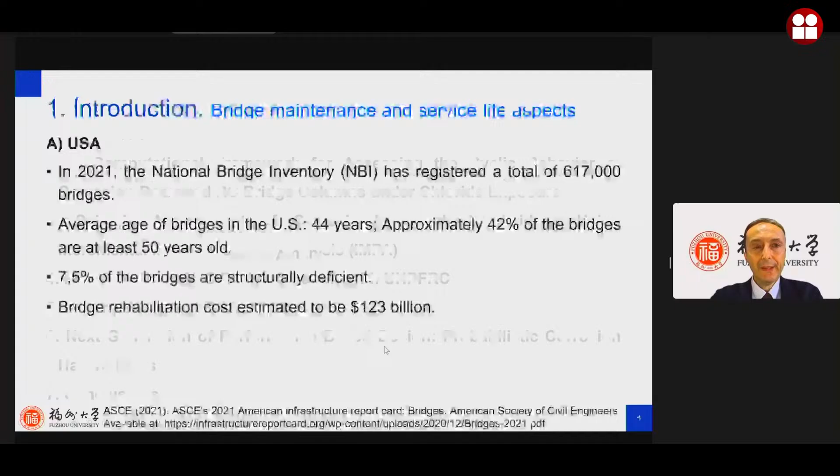So what is the problem with bridge maintenance and service life? If we look at the situation in the US, of the more than 600,000 bridges in the National Bridge Inventory, the NBI, the average age of bridges is more than 44 years. More or less 42% of the bridges are at least 50 years old. Another data point that gives us the dimension of the problem is that almost 7.5% of the bridges are classified as structurally deficient, so they need to be rehabilitated. This bridge rehabilitation cost was estimated to be more than 120 billion. So this gives you the dimension of the problem in the US.

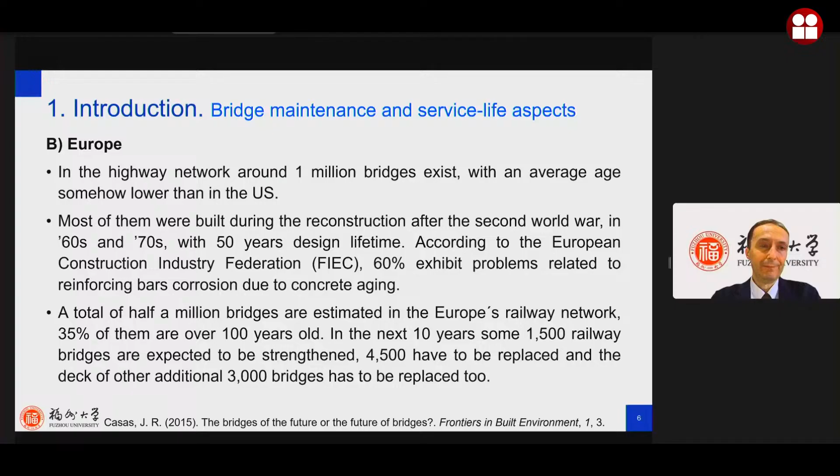Regarding Europe, we have around 1 million highway bridges, and most of them were built after the Second World War, so in the 60s and 70s, when they were designed for a 50-year design lifetime. Now we usually consider a design lifetime of 100 years, but in the bridge community we are opening a discussion to extend the design lifetime. I clearly remember a lot of discussion, for example inside the International Association for Bridge and Structural Engineering, to extend it to 200 or 150 years to have more durable bridges. According to the European Construction Industry Federation, 60% of these bridges already show problems related to reinforcement bar corrosion due to concrete aging. So this gives you another idea about the kind of problem we need to face.

What about China, the country where I've been working for 15 years? The number of bridges is not so far from Europe's, more than 900,000. The average age of bridges is much smaller than in the US, but even though they have mostly been built in the last 20 to 30 years, the proportion of structurally deficient bridges has already surpassed the US. It's becoming a really big problem also in China.

What about Mexico? Of course, you know your country better than me, but from what I know, the Mexican bridge management system reported that over 60% of the 8,000 existing bridges on non-toll highways have been in service for more than 30 years. So also in Mexico, I suppose this aspect of aging of existing bridges is becoming very hot. And on the other side, the average daily traffic is growing, and this is strictly correlated to the accelerated deterioration of bridges across the country.

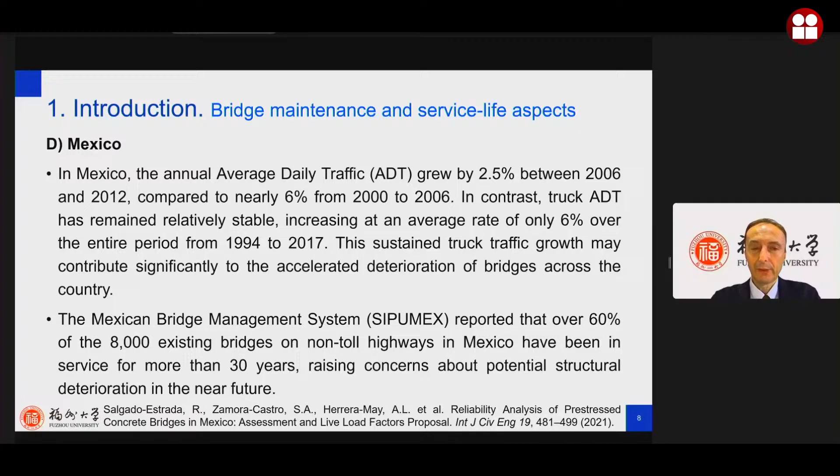So new solutions are needed to improve bridge sustainability and extend service lives.

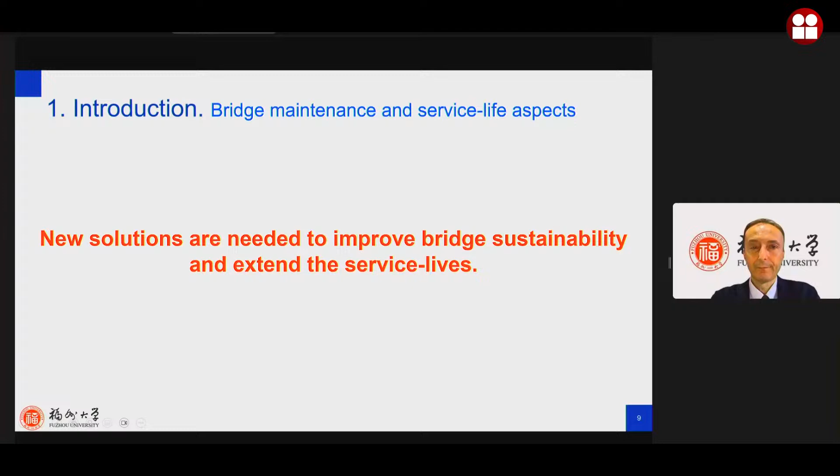If we go a little bit inside the problem, we know that concrete, this material that when it started to be used was considered to have a very long lifetime with no durability problems, but afterward we realized there can be degradation of concrete due to mechanical, physical, structural, chemical, biological causes, or also due to corrosion.

Entering a little bit inside reinforcement corrosion, it can be due to carbonation, to stray current, but also to the attack of chlorides. We will show only something related to this kind of corrosion. Reinforcement corrosion, of course, has a big influence on load-bearing and serviceability performance. There is the phenomenon of cracking in the concrete, so concrete integrity is influenced. There is a bar section reduction, a bond deterioration. And very importantly, the steel bar properties change due to corrosion, and there is a loss of ductility of the material.

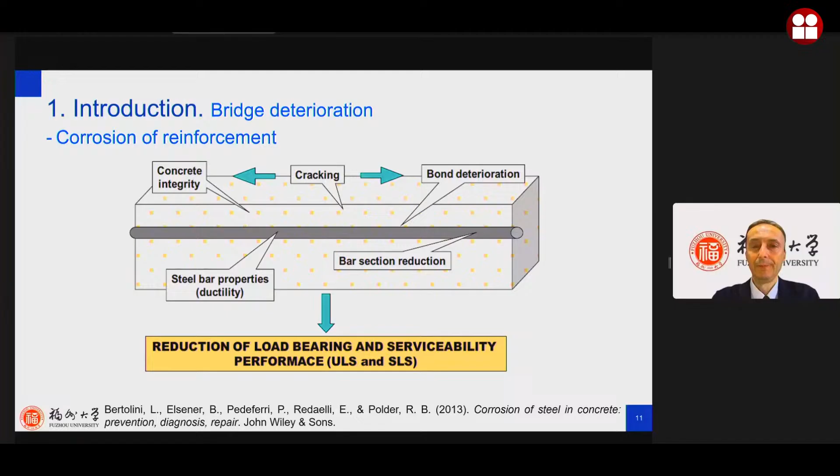The corrosion, and also this one is really well known, can be due to uniform corrosion, so the cross section is going to uniformly change, but there can be also the so-called localized corrosion or pitting corrosion.

There is a reduction of the cross section area, and so if there is a reduction of the cross section, of course there is a reduction of the rebar strength, but also the concentration of the deformation in the deepest notches, called pits, due to pitting corrosion, reduces the global ductility. And these things not only influence the strength and ductility, but also the buckling resistance of this section.

And if we consider, of course, the reinforcement in compression, this is a very important aspect during, for example, an earthquake.

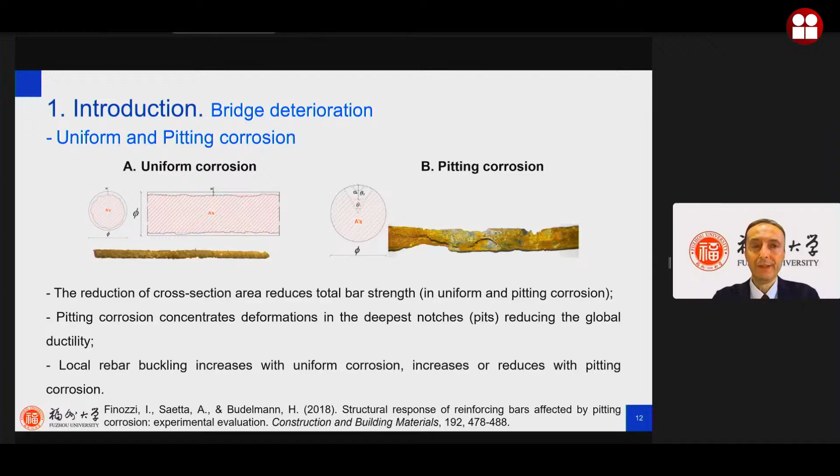We have also worked with Professor Humberto Varum. Tomorrow you will have his presentation. We, and some colleagues in Pakistan, Professor Masood Rafi, have investigated this kind of problem, trying to find some law for these kinds of problems.

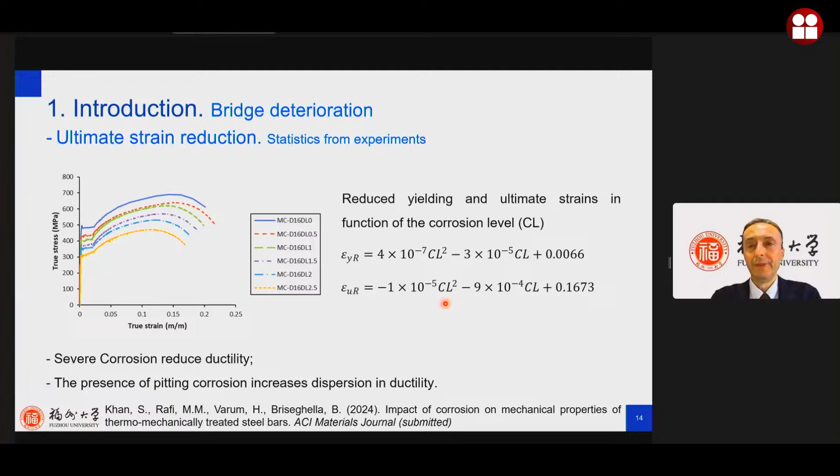But regarding this problem of the ultimate strain reduction, we have also proposed to give an interpretation. Now we'll not go in detail, but you can find all the references if you'd like in some of my publications, in structural concrete.

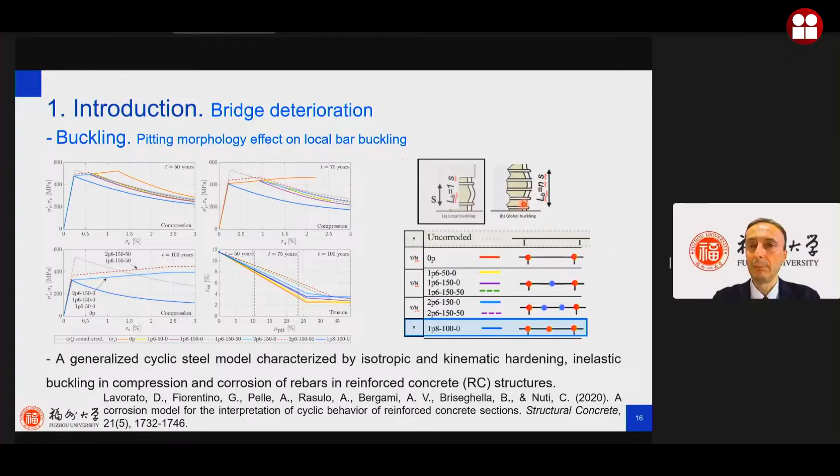And we tried also to develop a cyclic model for the steel reinforcement, able to consider the buckling effect and also the effect of corrosion. We consider the local buckling that can happen between one stirrup and the other, or also the global buckling that involves more than two stirrup transverse reinforcements.

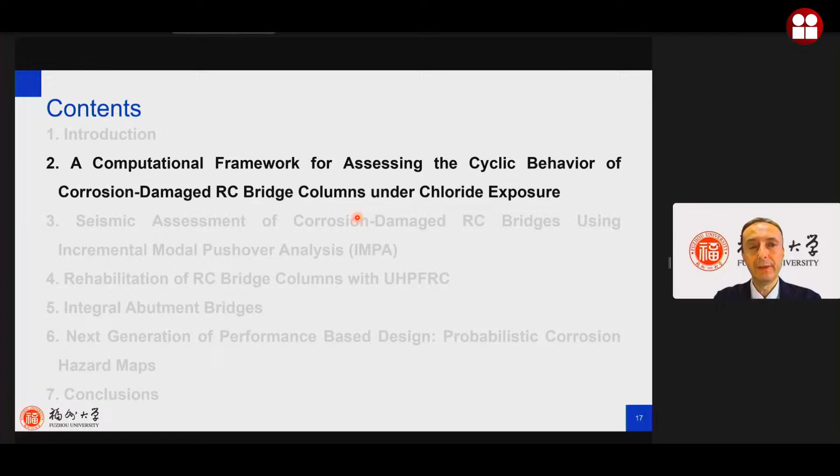But let me a little bit introduce this framework we have proposed for assessing the cyclic behavior of corrosion-damaged reinforced concrete bridge columns. The idea is to link multi-physics software—in this case we use COMSOL, probably some of you know this software—to do all the simulation regarding the durability of the steel reinforcement with this nonlinear multi-physics software.

And after, to do the structural simulation using a finite element software. In this case, we use OpenSees, but also other software, SAP2000, or whatever you want can be used.

In the COMSOL software, the chloride ingress in concrete was simulated as a diffusion process, and we consider the effect of temperature, humidity, corrosion-induced cover cracking, and concrete aging.

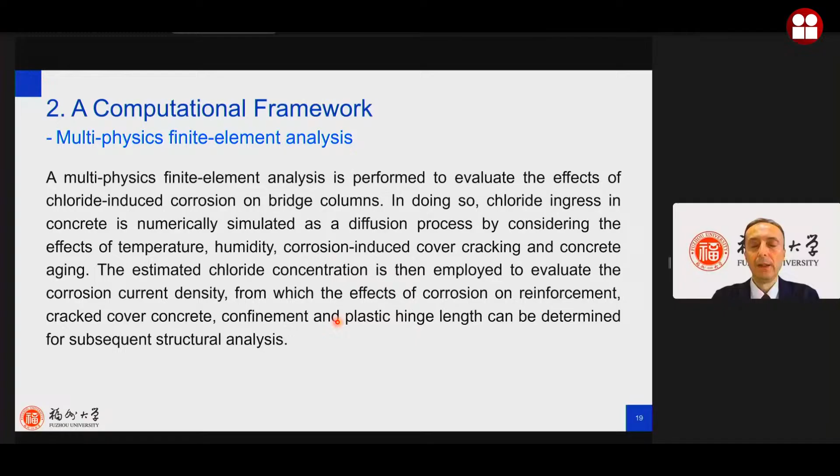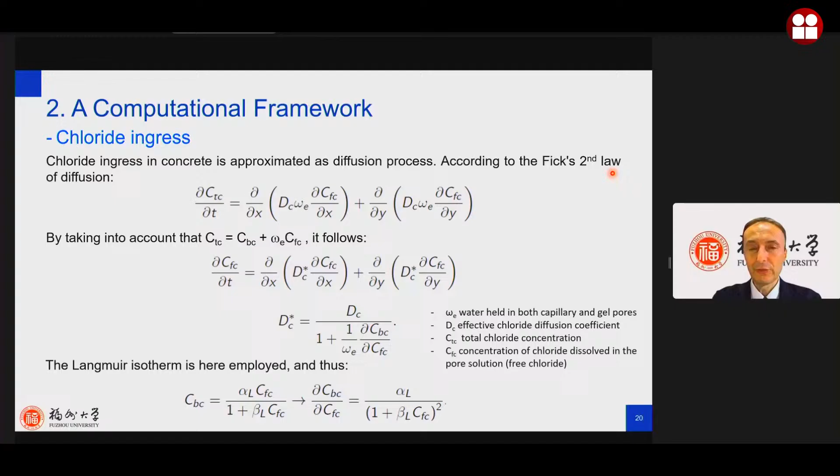Now, I don't want to enter in detail regarding the software we implemented, but just to give you an idea, the chloride ingress is approximated as a diffusion process according to Fick's law. After that, we consider the influence of external factors such as temperature, relative humidity, cover crack width, and concrete age.

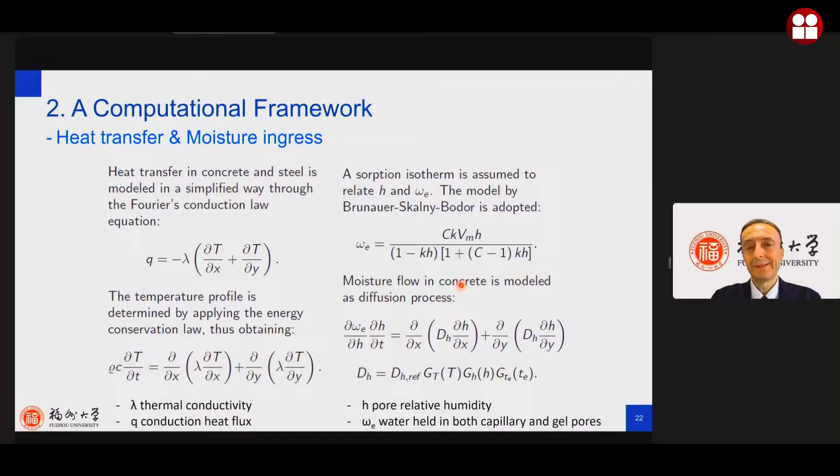Also this one, we took formulation from the literature, so there is nothing new. We consider also the heat transfer and moisture ingress using the Fourier law equation and a diffusion process.

Sorry to go faster, but I think we are entering a little bit too much into details. After this, we can estimate the corrosion current density. This is a law that is more than 20 years old. We are also trying to develop a new law based more on data analysis, but the big problem is that there is not so much data available yet. So we need more data.

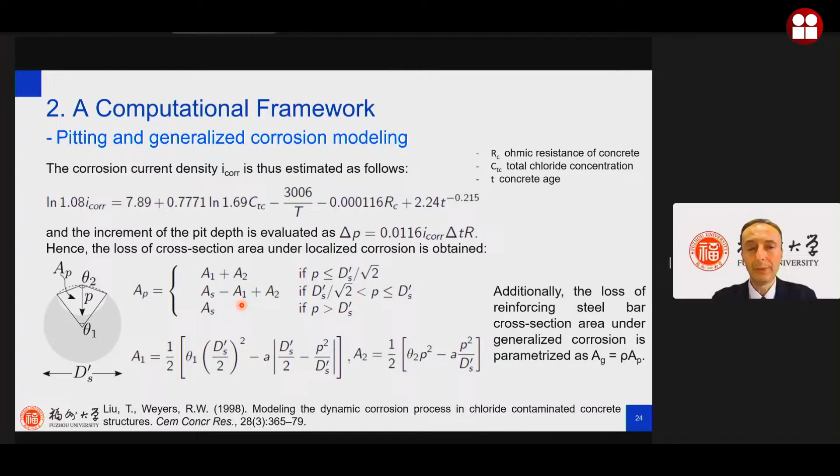And we consider the generalized corrosion, but also the pitting corrosion, and this is how we approximate the effect of corrosion. There are different methods to approximate the geometry of the pitting, but we use this one because for us it's accurate enough, and in the meantime not so complex to implement.

And after, we did a parametric analysis considering different possible corrosion paths. So we did not consider only generalized corrosion, but also localized corrosion, and we considered that the worst condition could be the formation of one pit in the middle between two stirrups, and after that, a high probability of pitting at the stirrup location.

And regarding the dimension of this pitting corrosion, starting from the literature, we made some hypotheses about the pitting factors, and also regarding the dimension of this pitting.

But let me go to a case study to show you the results you can obtain. We consider a typical Italian bridge built in the 70s. It's done with two columns, transversal beams, and afterward it can be simply supported or it can be a continuous bridge, maybe with a link slab linking one deck to the next one.

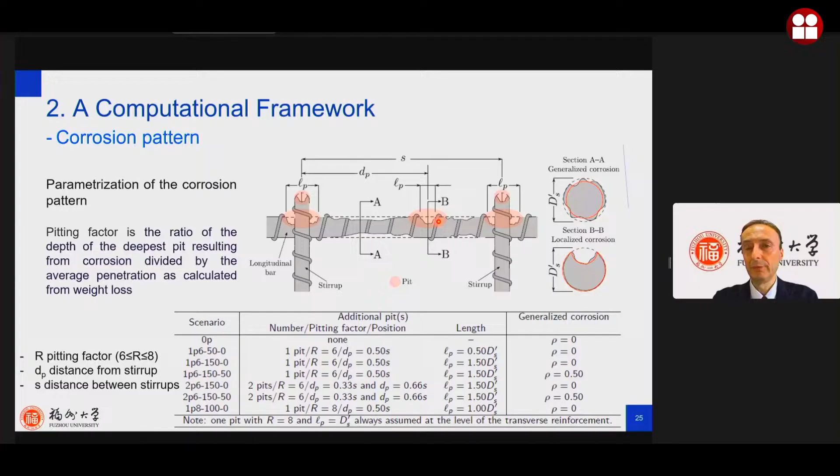We obtained interesting results because only in one configuration that we consider—the one associated with only one pitting in the middle with a severe pitting factor of 8, and the dimension of the pitting equal to the diameter of the steel rebars, so the length of the pitting—

we obtain that you can have buckling even if you are still in the elastic phase. For all the other cases, you enter the nonlinear phase first, and after that you can have buckling of the longitudinal rebars.

And what we found is that the stiffness of the transverse reinforcement is fundamental to avoid the buckling of the longitudinal reinforcement. This stiffness becomes lower than the required stiffness needed to avoid local buckling after about 86 years, 84 years, or 75 years, for longitudinal rebar diameters equal to 20, 24, and 28.

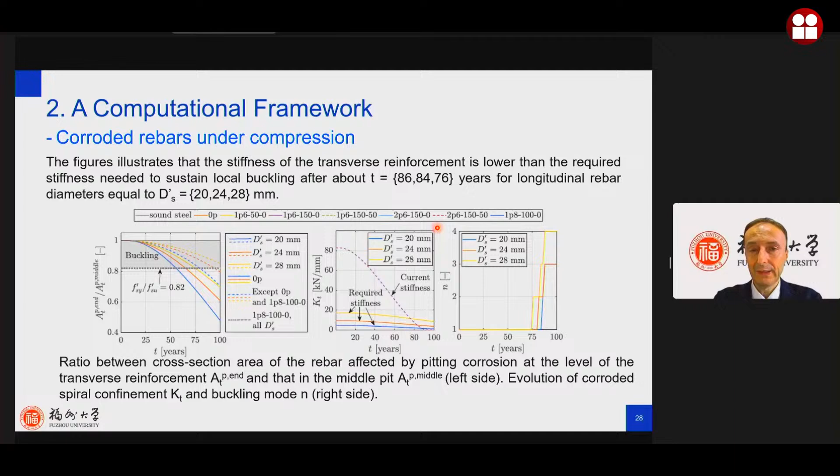These are the reinforcement diameters usually used in bridge columns, at least in Italy. So after 85 years, it means you could have not so much problem of buckling of the longitudinal rebars.

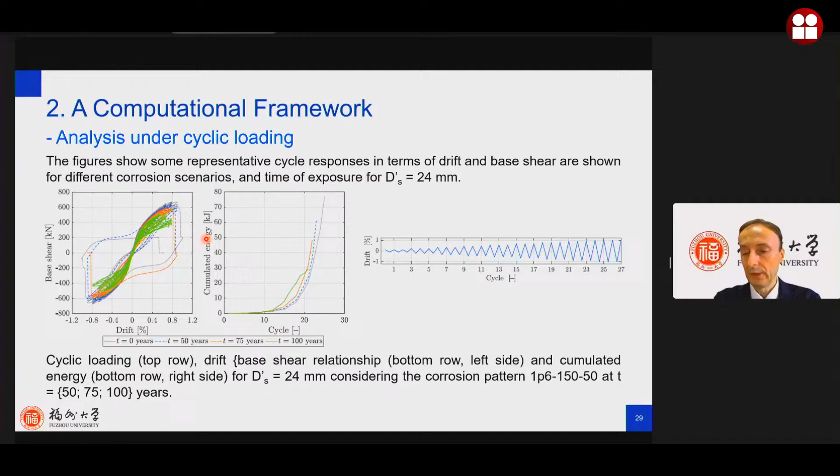This is also due to the possibility of having buckling or not in the cross section. Of course, buckling doesn't give you the possibility to arrive at the ultimate capacity of the cross section.

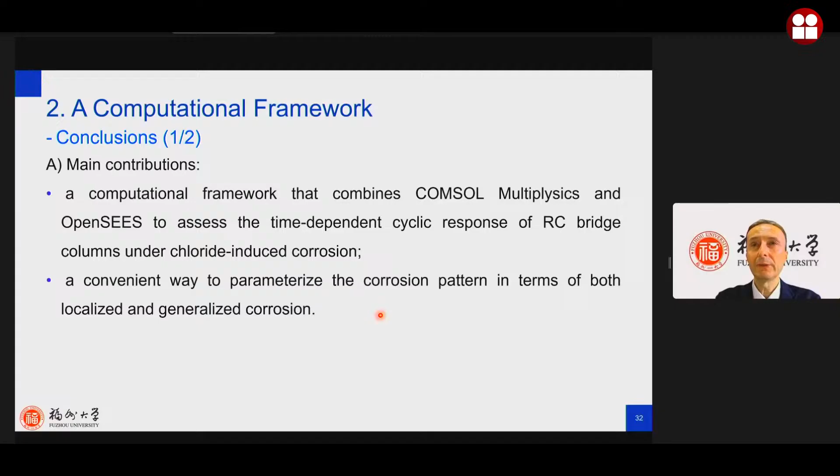This aspect is quite important, and gives you the idea that we still need research on this topic to give general rules that can be applied in engineering practice.

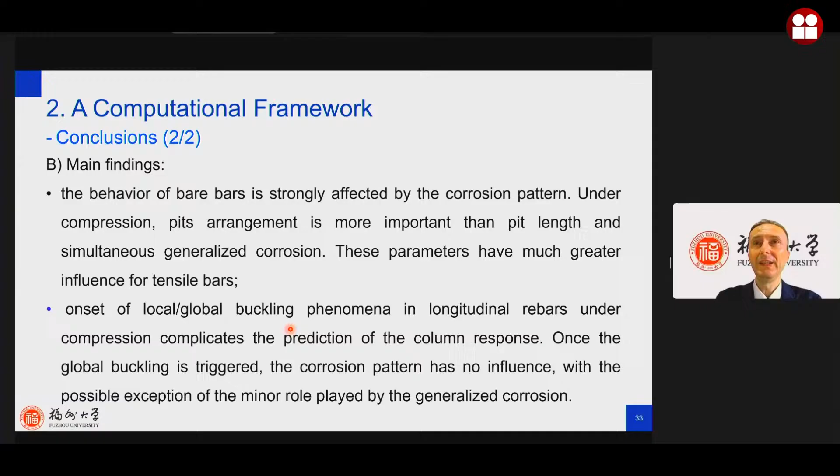As I told you before, we are really interested in developing alternative methods to incremental dynamic analysis, the so-called IDA, which is used a lot in the assessment of existing bridges. For us, it's very important to work on pushover analysis. We try to propose an efficient yet accurate procedure for the seismic assessment of reinforced concrete bridges subject to chloride-induced corrosion, so we propose to use the incremental modal pushover analysis.

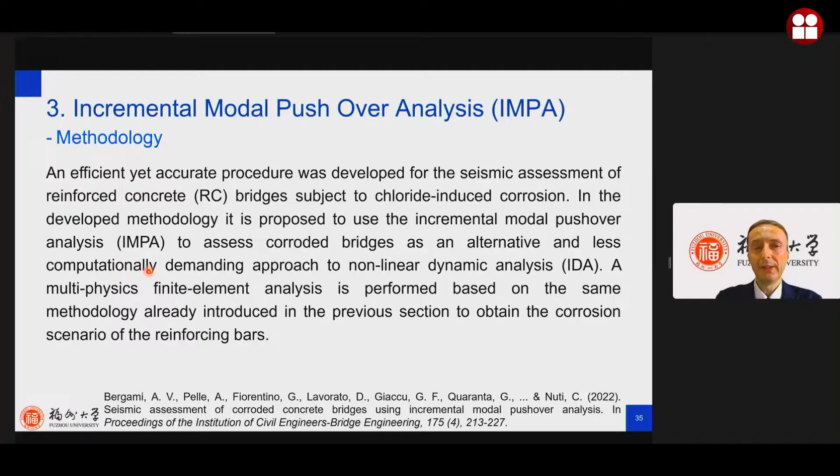IDA is a very good technique, but it's also influenced by the scaling factor, and we don't have many registered inputs at high intensity, and it's also a bit computationally demanding. That's why we propose what we call IMPA beta. It requires performing an incremental modal pushover analysis together with an incremental uniform pushover analysis, and then deriving a univocal capacity curve that is an envelope of the results from both analyses.

We applied this analysis to a typical irregular bridge, a four-span continuous bridge considered as a benchmark, I think starting from a US-Japan workshop on bridge engineering about 30 years ago. The piers are 14, 7, and 21 meters tall, so a typical irregular bridge.

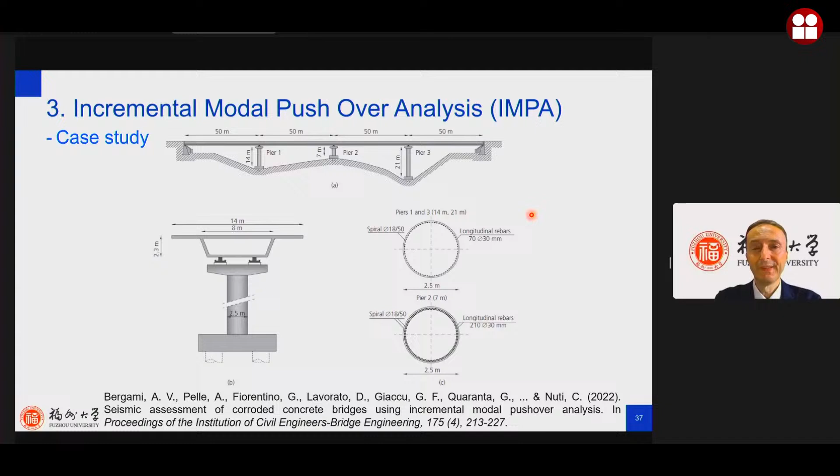We considered different scenarios for the corrosion of the longitudinal bars and the spiral, obtained using the same simulation done in COMSOL that I showed you before, considering different cover dimensions, 50 millimeters or 20 millimeters. This is because, from our engineering practice, the cover used in the 1970s was limited most of the time to around 20 millimeters, and only recently, at least in Europe, have we started using a larger cover.

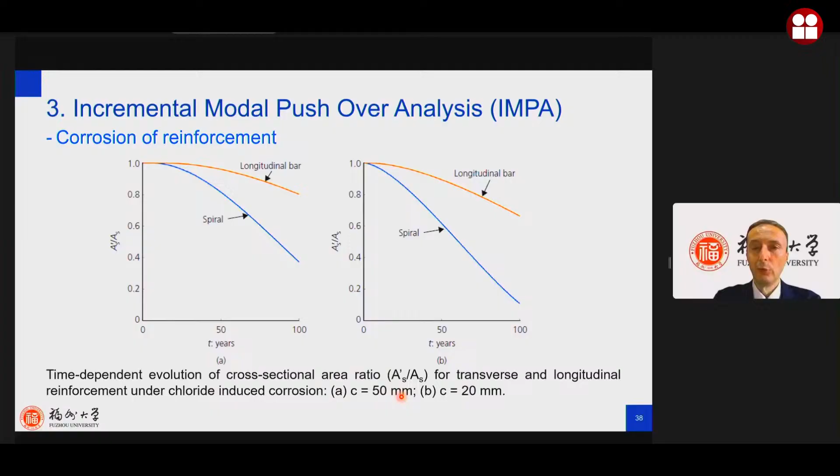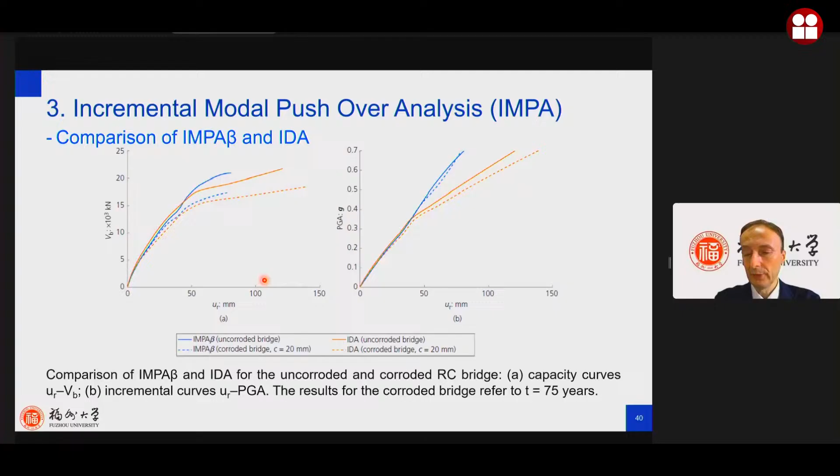We compared the results obtained with IMPA beta with those from IDA to see if we obtained the same results, and the results were similar. Of course there are some differences, but related to the different characteristics of the simulation, we can see that they are consistent.

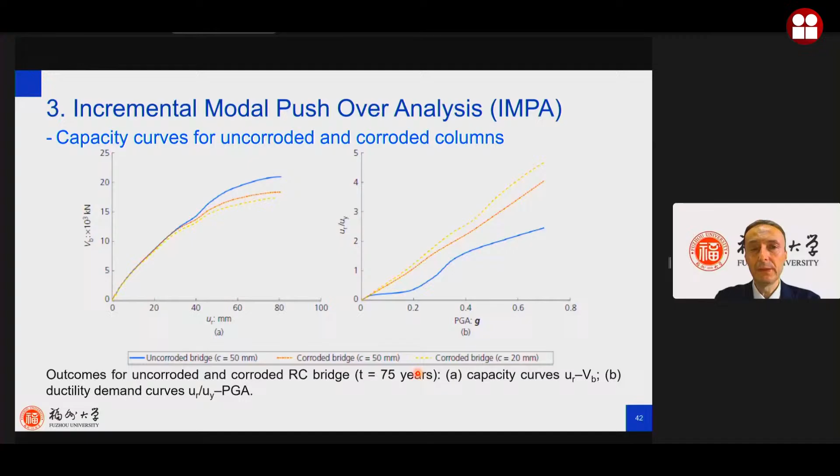Also you can see the capacity curves for non-corroded or corroded bridges, for example after 75 years, and how they change.

Going to the conclusion, we can say that this IMPA for bridges, the incremental modal pushover analysis, gives results that match those obtained with IDA, even in the case of severe corrosion phenomena. We only obtained some difference in the deck displacement, but for seismic intensity levels greater than the design condition. So we think that this method can be used.

As I told you before, we tried to simplify the multiphysics analysis, and we think that the effects of temperature, humidity, and aging can be considered using physical-based models, for example using COMSOL, where they can be simulated. But for considering cover cracking, they can be simulated with data-driven models. It's what I already told you, that it's needed to simplify the procedure to make it applicable.

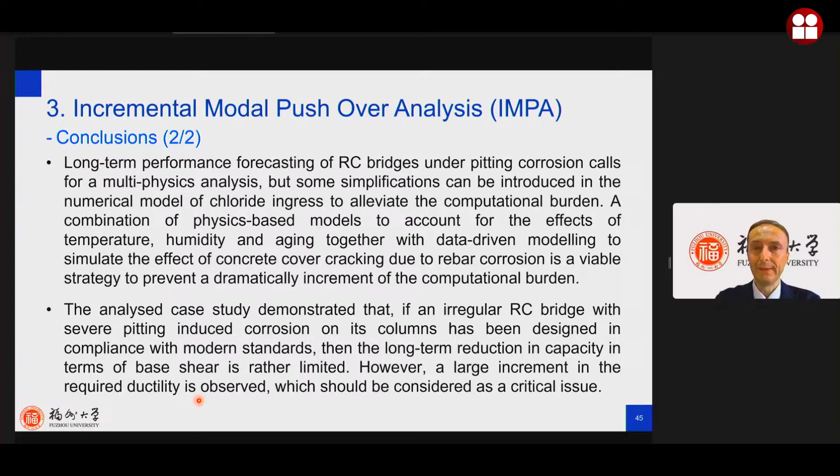Because in real cases, if you have a bridge, you need to go to the column and change the longitudinal reinforcement. This is time-consuming and very expensive. So what can be done? We enter the next section, which speaks about the rehabilitation of reinforced concrete bridge columns using ultra-high performance fiber reinforced concrete.

Now in the bridge community, ultra-high performance concretes are becoming very, very popular. We are speaking about materials with a strength larger than 150 megapascals, with a very low water-to-cement ratio, and that are very, very compact.

They have very good durability characteristics, and as I told you before, this attracts me and my research group a lot. So the possibility to have a material with very high durability characteristics, you can immediately argue regarding the cost of this material.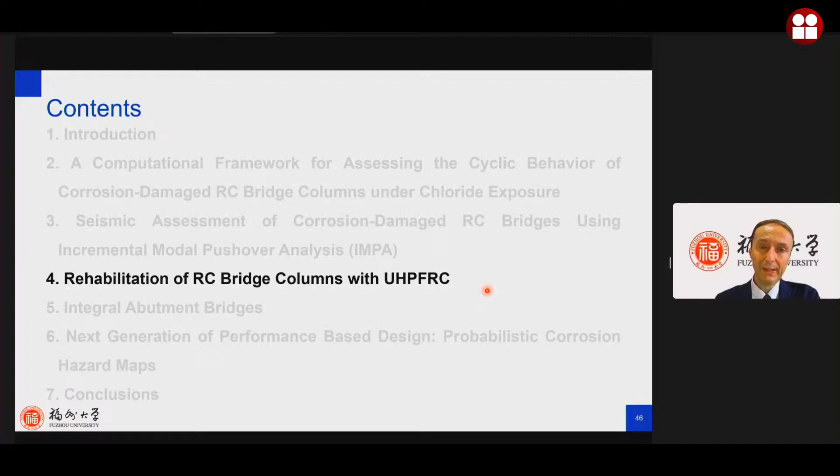So in this case, the idea is to restore the strength, stiffness, and utility of the original column in a short time. So this is very important, the time of restoration.

Yesterday, Professor Ayala introduced us the concept of resilience. So this is very important, to go back to the starting characteristic of a bridge in a short time without altering the cross-section dimension.

And this is also very important. Most of the interventions proposed in the literature propose to have an increment in the dimension of the cross-section of a column. In many cases, at least in Europe, this is not possible because there is a street very close to that, so you cannot increase the cross-section.

Another very important point is the increment in the capacity, I mean the strength, of the bridge column. For us, this is not always the right way, because if you increase the strength of the bridge column, in the meantime, you need to strengthen the foundation, because these forces go to the foundation. So they are strictly correlated.

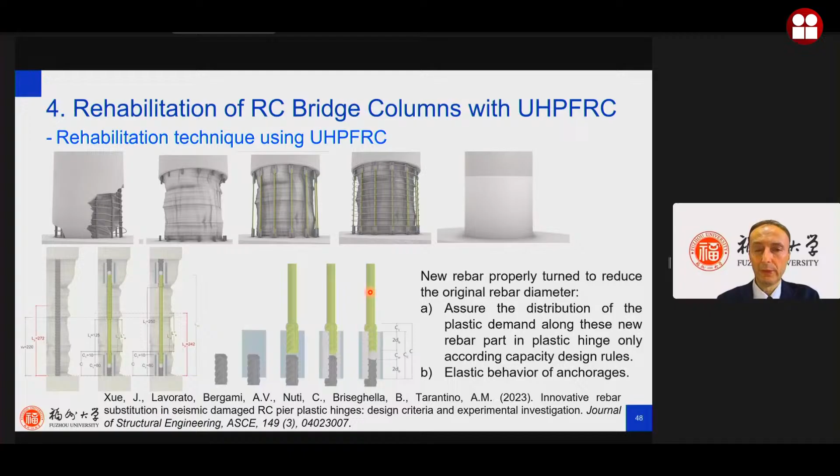We also propose some analytical models to design this kind of solution, and you can find them in some published papers. Just to show you some pictures, we did it in the lab, for scaled piers at scale 1 to 6, but also at scale 1 to 3. Why different dimensions? Because we wanted, and it's what we are still doing, to investigate the scale factors. That is always a big issue when you go to the lab, but even if it's a traditional problem, it's something that still needs to be investigated.

So you can see here the connection. This kind of connection was selected after comparing many different other solutions using mechanical connectors or welding connectors. We selected this one because when you go to put another steel rebar and you already have rebars here, there can be problems with alignment of the existing reinforcement with the new one. So to solve this geometrical tolerance, we considered that these kinds of connectors can be very good.

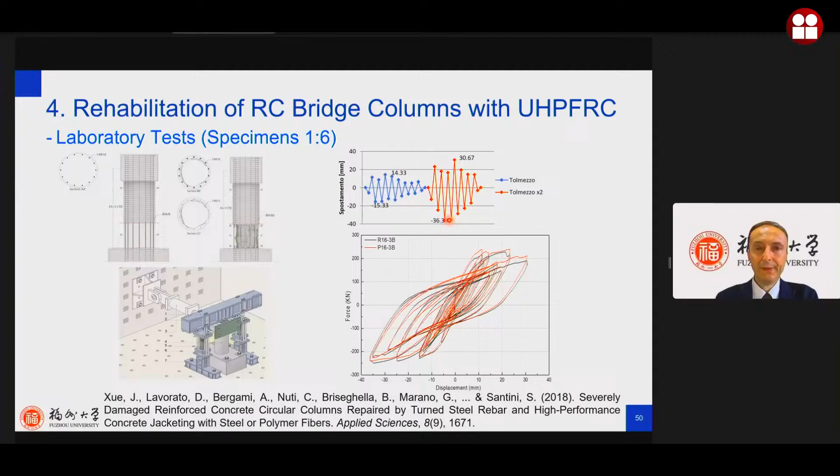And we also implemented finite element models. As I told you before, I already showed you this kind of model where we consider all the different effects we have, with the strain penetration and so on.

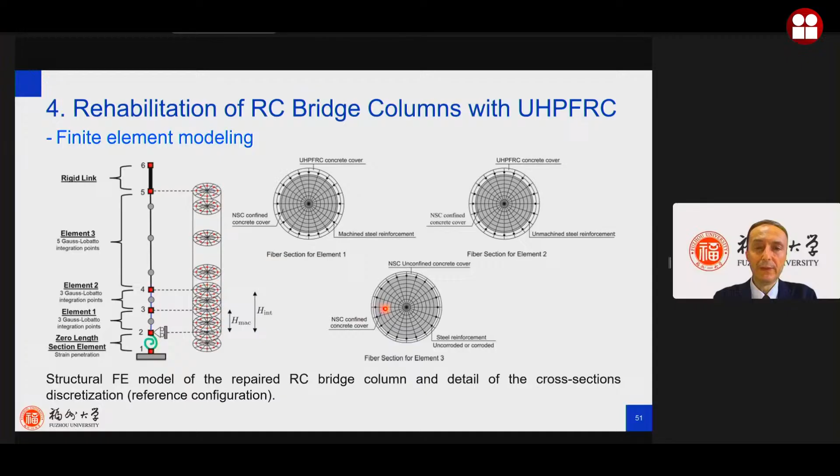For the concrete, we consider two different situations because, of course, when you rehabilitate the bridge, the normal concrete in the core is in some way confined by the new ultra-high performance fiber reinforced concrete cover. So we consider this effect. And we also consider the stress-strain relation for ultra-high performance concrete using the Naeimi-Moustafa law. So we calibrated the concrete adequately to the OpenSees material we use. If you are using OpenSees, you probably use this kind of element, so we calibrate to follow this law proposed in the literature.

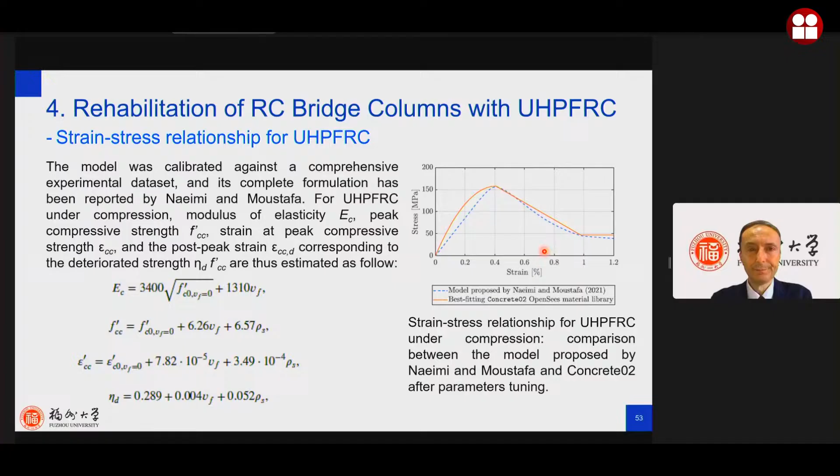Actually, we did many tests on ultra-high performance concrete and developed our own tri-linear model. But at that time we used the one in the literature. And we analyzed the same bridge I showed you before, exactly the same one.

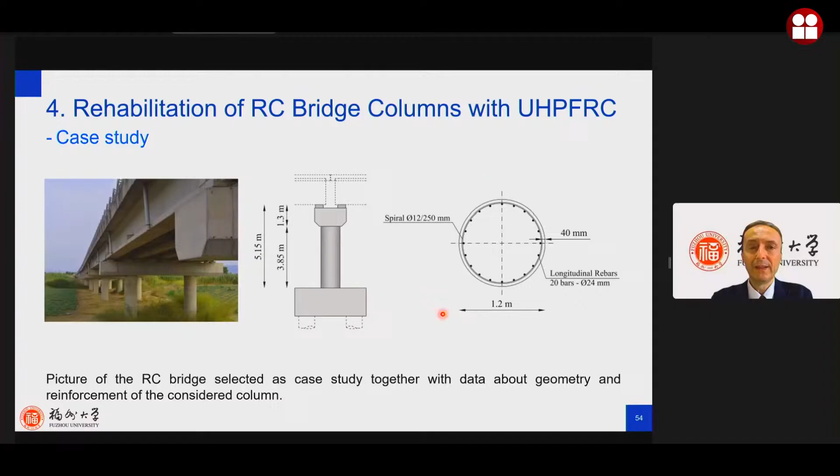We considered different dimensions of the intervention. The idea was to investigate how long the intervention with ultra-high performance concrete should be. Should it be the same dimension as the plastic hinge, where I'm going to change the steel reinforcement, or should it be longer to avoid relocation, the changing of the position of the plastic hinge? We were worried that if the intervention, the part of the bridge column where you put the ultra-high performance concrete, is equal to the length of the plastic hinge of the part where we change the steel reinforcement with the new one, as I showed you before, we would have a reallocation of the plastic hinge where we do not have the ultra-high performance concrete.

So we tried to investigate it. We also tried to investigate how the reduction of the cross section of the steel reinforcement we are changing should be done. This is the so-called turning factor. It's something like, I mean, we reduce the cross section in that area.

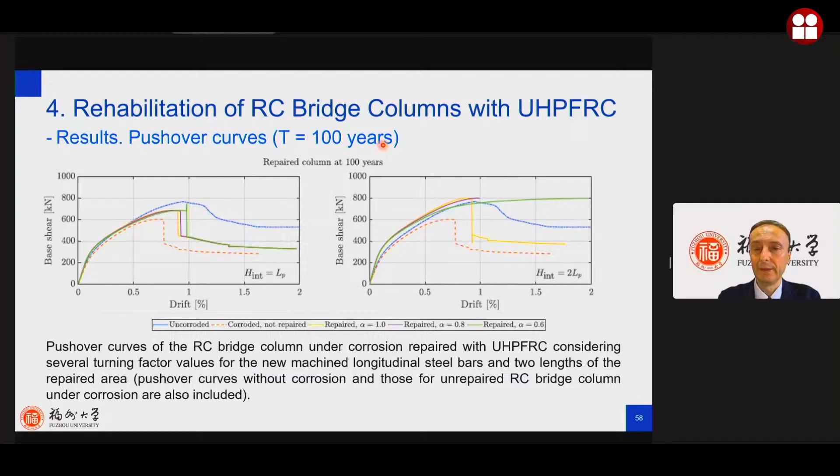So we also consider, as I told you, what happened in the section at the base, but also what happened in the first unrepaired section, to avoid the formation of a plastic hinge immediately above the intervention area.

We can see that if we do the intervention without changing the steel reinforcement, only using the ultra-high performance concrete—this is the easiest way, I do not change the steel reinforcement, I only put the new concrete in ultra-high performance concrete—what you get in that case is that the plastic hinge changes position from the base section to the first unrepaired section. So this should be avoided.

It's why, now, sorry, I'm really spending a lot of time. I don't want to go into details, but this is very, very important.

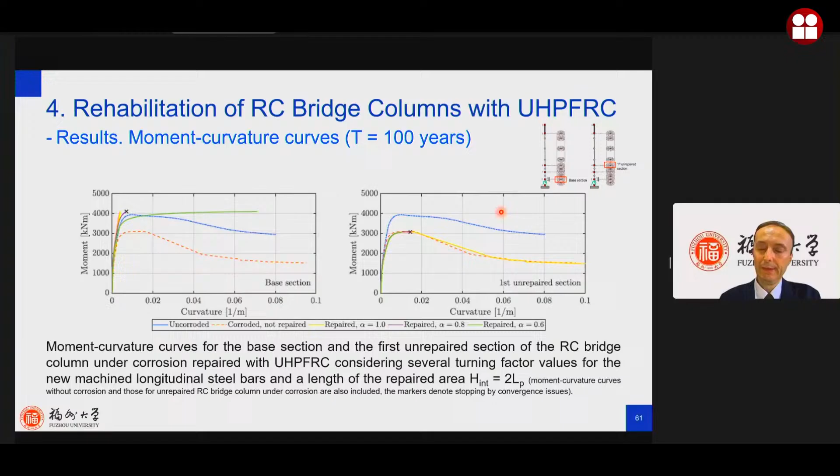So from our point of view, the best compromise was to use an intervention with ultra-high performance concrete that has a dimension of twice the plastic hinge dimension, and to also change the steel reinforcement using a turning factor of 0.6.

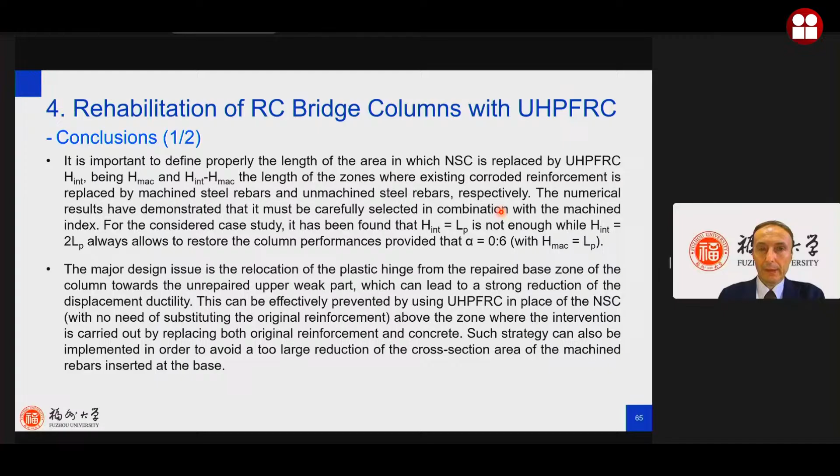Let me introduce you, in a very quick way, to another very important thing from my point of view to extend the service life of bridges: the integral abutment bridges technology.

In the title I put innovative material technologies. Yes, ultra-high performance concrete can be considered a quite new material. The concept of integral abutment bridges is not new—it comes from more than 100 years ago. It seems that during the reconstruction after the Second War, at least in Europe, we decided to make everything prefabricated, simply supported, with a lot of bearings and expansion joints, and afterward we realized it's very expensive due to maintenance and the durability problem of joints, expansion joints, and bearings.

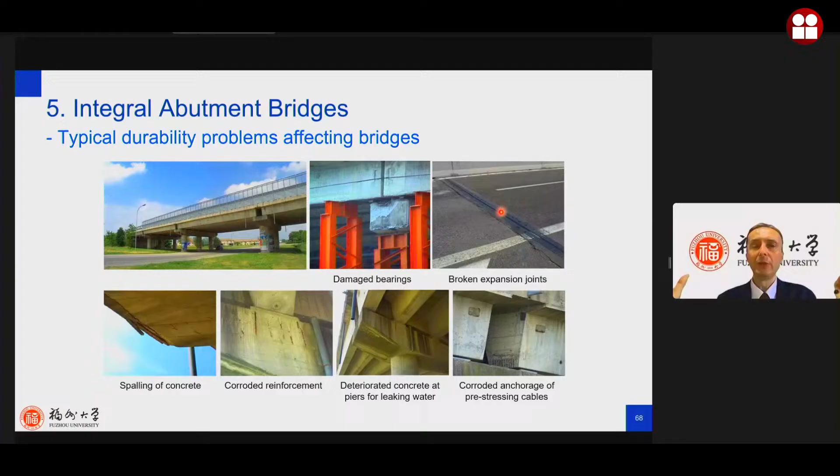So my question is: is it possible to eliminate or partially eliminate these expansion joints and bearings? And what's the seismic behavior and the behavior of this kind of bridge induced by live load, and particularly by the expansion and contraction induced by thermal variation?

A typical integral abutment bridge, at least a new one, is done like this: it has a slender abutment and an approaching slab. The approaching slab can be supported by a sleeper slab. The backfill can also be supported by some geogrid or something like that. And there is also continuity with the superstructure, to have a big frame.

And after that, you can have some joints that are far away from the deck, and this helps a lot. In fact, you can have two different approaches: you can have a very slender abutment, so when there is expansion and contraction, the bridge can move. Or you can have a very rigid abutment, in which case the abutment can be considered fixed.

And of course, the expansion and contraction is avoided, so you can have big forces in the deck induced by thermal variation. If the deck is very flexible, you do not have high stresses induced by thermal variation in the deck. These are two completely different situations. The real situation, of course, is in the middle, where you should also consider the interaction with the soil.

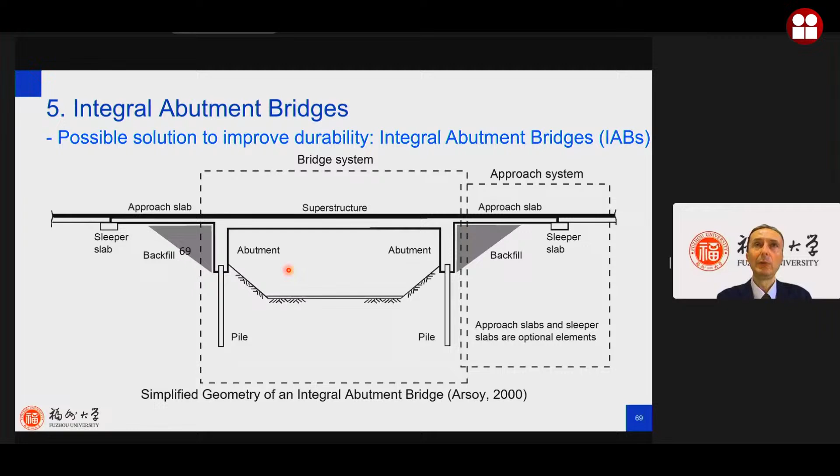This link slab concept, starting from the reference work of Alp Caner and Paul Zia, we know can have some cracking problems. There are some indications to try to limit this cracking, but still there are some concerns.

In recent years, several materials have been used in the construction of link slabs. Conventional concrete can have cracking problems, so fiber-reinforced concrete has been used a lot to limit the cracking, with steel and synthetic fibers.

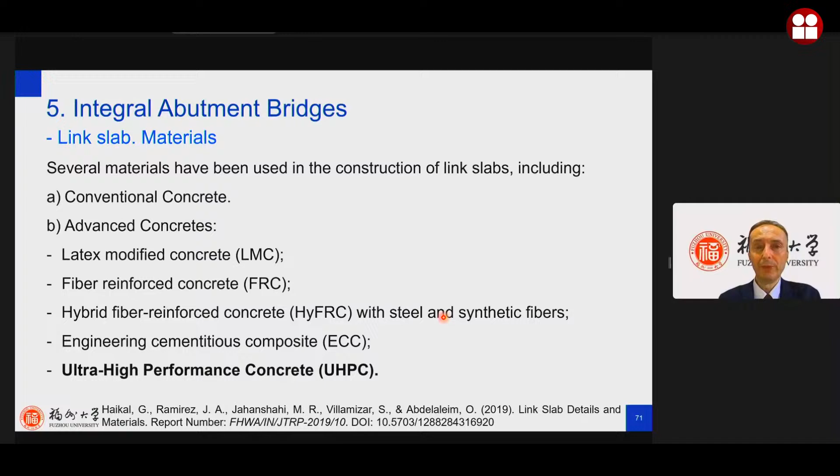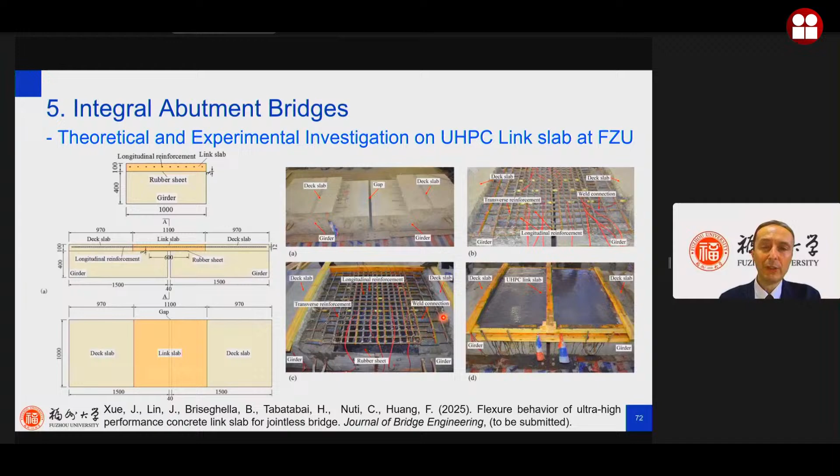This is what we have investigated in recent years, thanks to the work of my PhD students and our assistant professor, Mr. Lin. We did many experimental tests considering bending, but also axial force acting on the link slab made with ultra high performance concrete, trying to optimize the dimensions and how to design the material and the link slab.

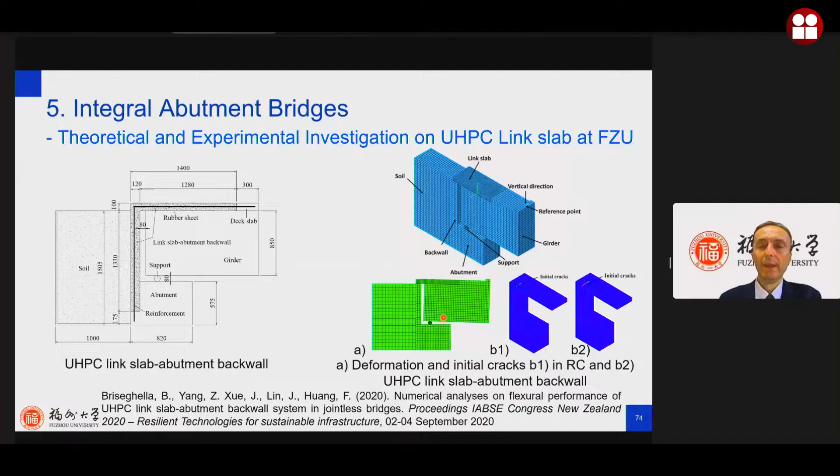We also investigated a lot from the numerical point of view this kind of solution. We considered not only the link slab between one girder and another, but also between the girder and the abutment wall in the case of integral abutment bridges, where you want to eliminate the joint also close to the abutment. We also proposed a precast ultra high performance concrete link slab to avoid the problem of casting on site with this kind of material.

All these things have been published in some conferences, and we are submitting some papers to journals. If you are interested, please contact me. We have also applied this to some real cases in China.

But there's the problem due to soil-structure interaction induced by thermal loads, so there can be contraction or expansion, and this cyclic load can also induce a separation, a gap between the abutment and the backfill.

This is why an approach slab should be carefully designed to be a bridge between the real bridge and the backfill, or we should use other technology, as I will show. The soil-structure interaction should also be investigated.

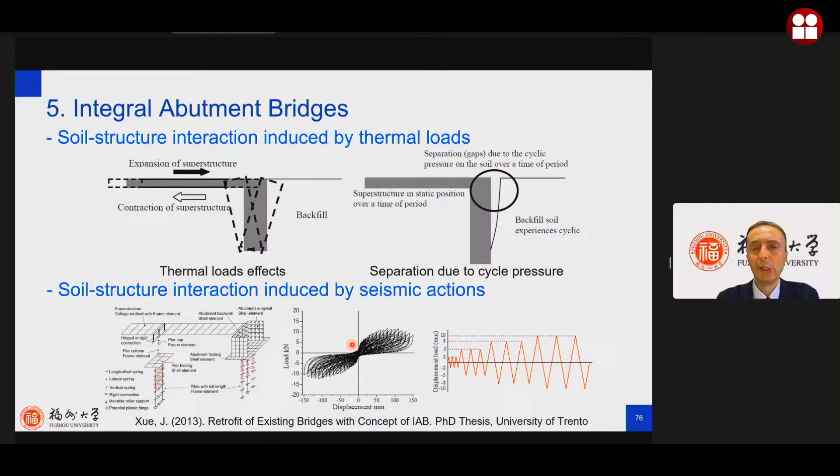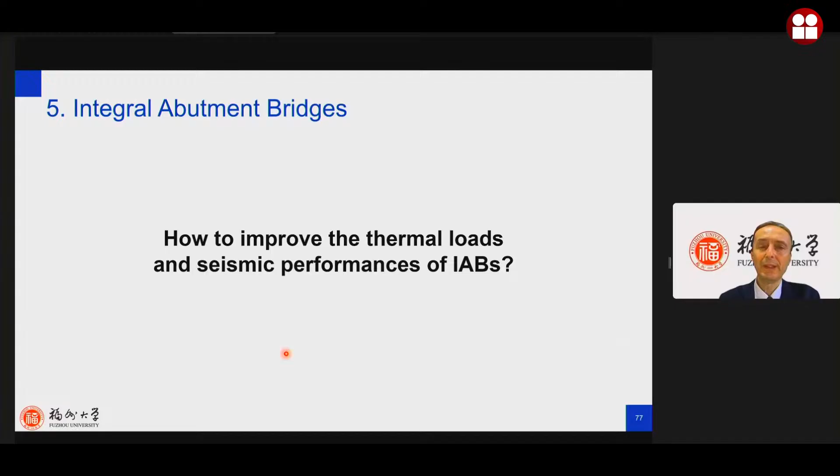So how can we improve the thermal and seismic performance of integral abutment bridges? One technology could be to use a flexible backfill, separating the abutment wall from the backfill using very flexible materials like EPS, which has high deformation capacity. The backfill can be supported using geogrid, which helps because this way the backfill is not directly pushing on the abutment.

Or you can also use another technology: piles with a pre-hole. Consider a pile, and at the end you create a pre-hole. If you use this, you increase the flexibility of the pile. If you increase the deformation capacity of the pile, the bridge becomes more flexible, so you have less problems regarding thermal expansion and contraction.

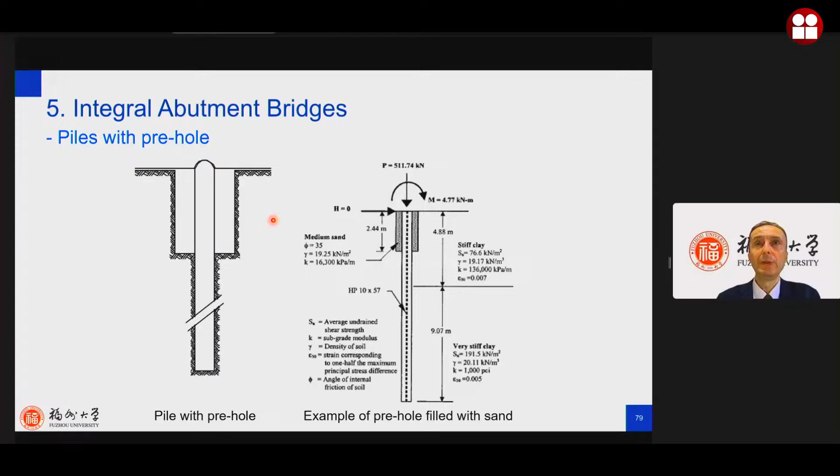From the other side, it can also help the seismic behavior. Think of the concept of seismic isolation, where you increase the period and so improve the seismic performance. But this is not enough - as in seismic isolation, you also need damping.

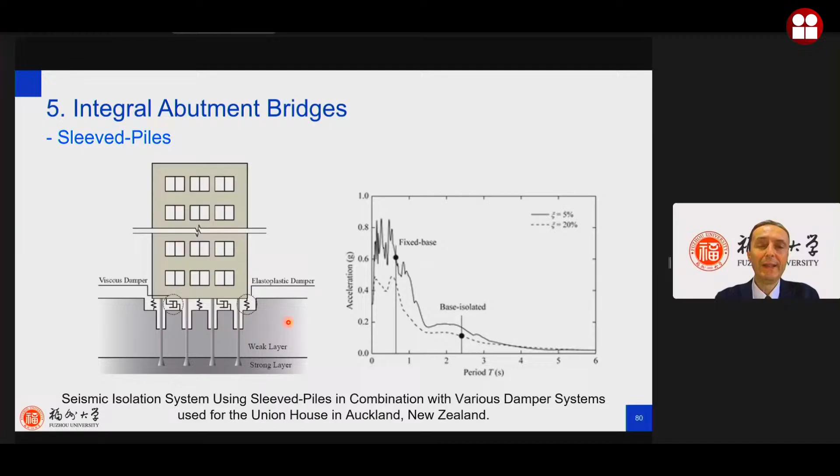So you need to increase, in the meantime, the damping and also the deformability. So you increase the period and decrease the action. This is an old concept, also used in some buildings like this one in Auckland, New Zealand, where viscous dampers were used.

But we don't want to use viscous dampers, we want to try to use some very cheap material. So starting from the concept of geotechnical seismic isolation, where a rubber-soil mixture is used, you can increase damping and increase the period. We also investigate this kind of technique. We are also trying to develop a method to carefully consider the nonlinear behavior of the soil, mixing the discrete element method to obtain the characteristics of this engineering soil with a method called Preisach formalism to simulate the nonlinear behavior of the soil. This is something we are actually working on.

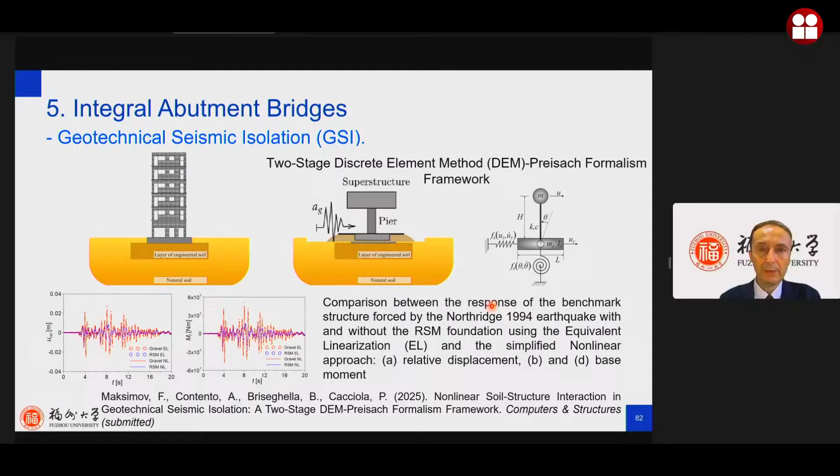We try to use this concept of the pre-hole technology also in piles, using a pre-hole and high damping material, mostly rubber inside a soil-rubber mixture of different characteristics inside the pre-hole. This concept is not new, it was studied by some Italian professors some years ago, for example Professor De Stefano, and also investigated by Professor Mylonakis, one of our friends and collaborators from the University of Bristol.

We use this concept in this bridge. You see here, it's a bridge in Shenzhen, in the south of China, close to Hong Kong. It's a three span precast post-tensioned concrete bridge, each span is 30 meters. You can see here detail of the cross section. We were involved in the design of this bridge in Shenzhen, and it has concrete piles, 25 meters long, 1.5 meters of diameter, and it's a fully integral abutment bridge.

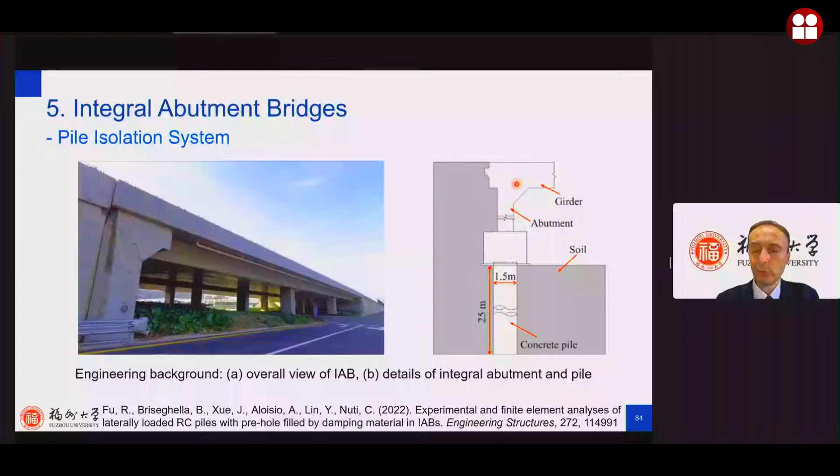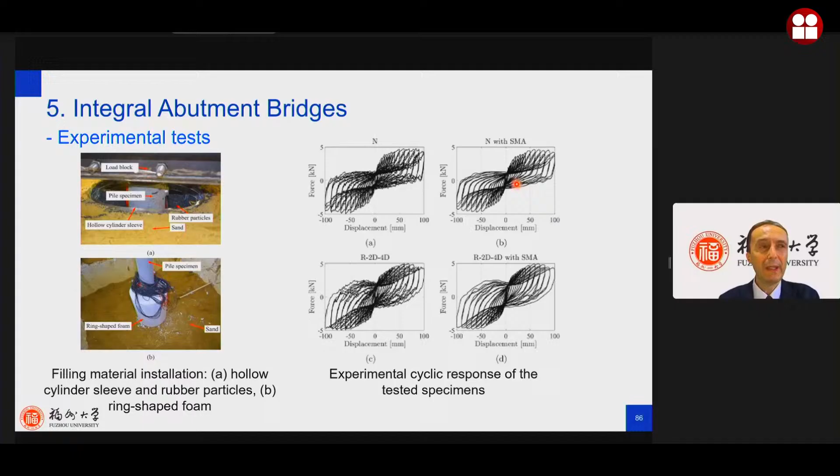So no expansion joints and no bearings. We did many tests on scaled models using cyclic tests, but we also performed some shaking table tests on our facilities in Fuzhou. We simulated both the scaled test and also one-to-one to try to investigate the scale factor effects. We proposed some P-Y curves that can be used in engineering practice for this kind of work.

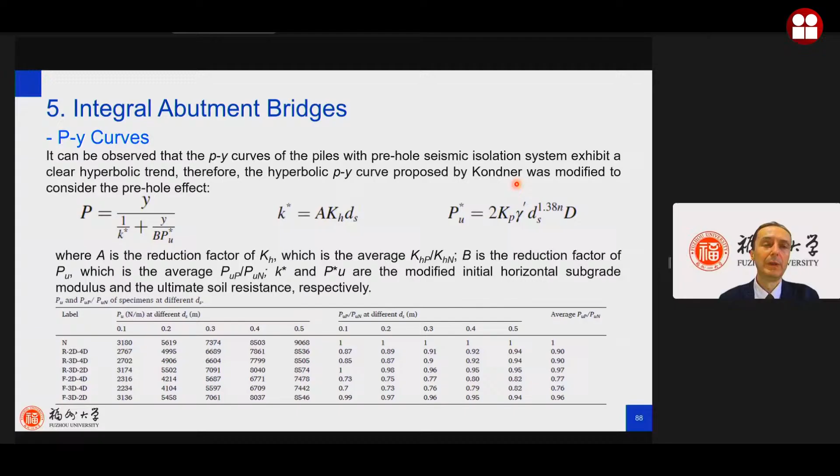Sorry, I'm going fast, but I think my time is almost finished, and sorry if I'm so long.

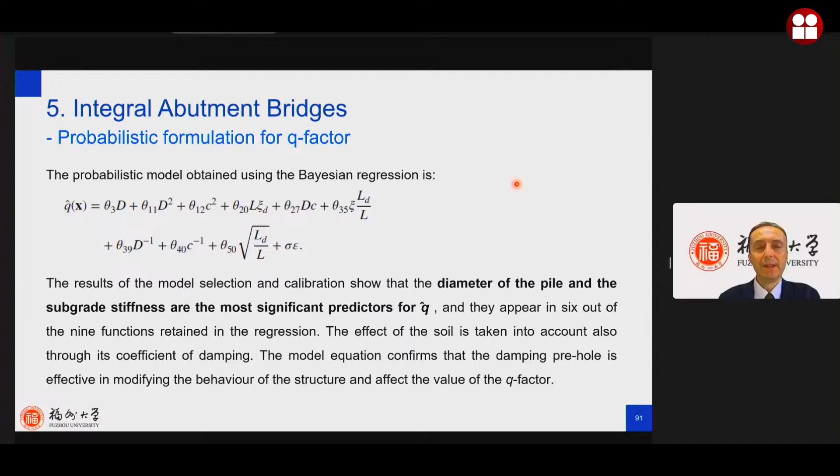We also consider the effect of the pre-hole on the inelastic response of this kind of bridges, and we investigate the different effects of a pile with no damping pre-hole or with damping pre-hole. Using some simplified Winkler model, we formulate some probabilistic model using Bayesian regression. This is not so important, but only to tell you that we try to give some indication that can be used in the design of this kind of bridges.

Now, let me briefly introduce also what we have done some years ago inside the Horizon 2020 program with University of Bristol, Roma Tre University in Italy, the University of Porto in Portugal, the University of Ljubljana in Slovenia, and the Technical University of Kaiserslautern in Germany.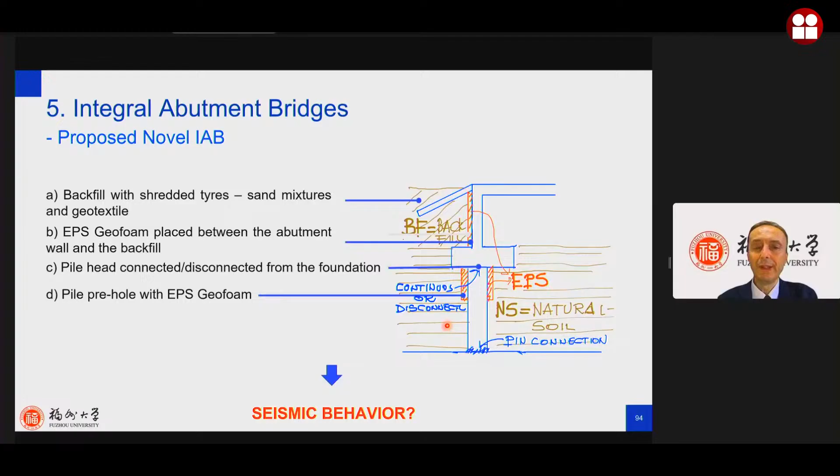And what was interesting from the beginning, we start to consider the possibility to have a pile connected to the abutment foot, or not. So it can also be disconnected, so you can have movement between the pile and the abutment wall and the superstructure. And to have also a pile with a pre-hole where you can use soil mixture or EPS inside, and you can increase the deformability. So what is the seismic behavior of this kind of bridges?

We consider a typical European integral abutment bridge in concrete, like this one, and we did the model. We went to the lab, in this case not our lab in Fuzhou, but the shaking table of the University of Bristol, because these tests were paid for by this European project. This is how we used the instrumentation, only to let you understand. We consider different kinds of configuration of the EPS, and we consider also having piles connected or not connected to the abutment foot.

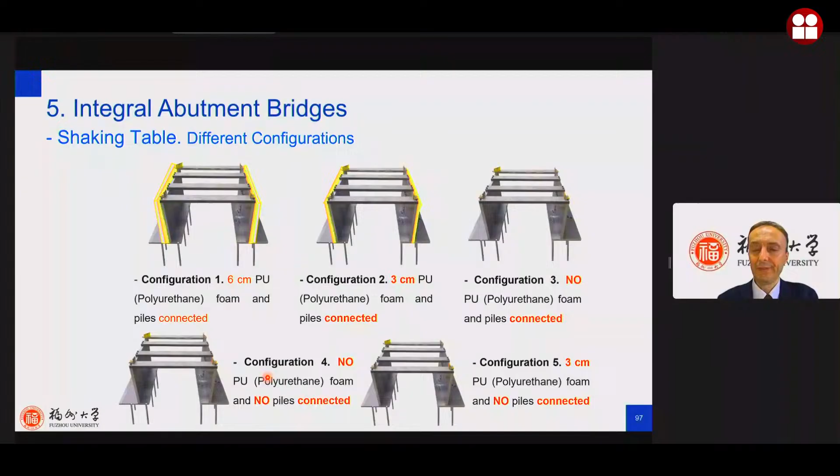So the different cases that we would like to investigate, we went to the shaking table. You can clearly see that when the earthquake in longitudinal direction arrives, you have a bit of settlement of the soil close to the abutment wall. That also shows the pressure between the soil and the abutment wall.

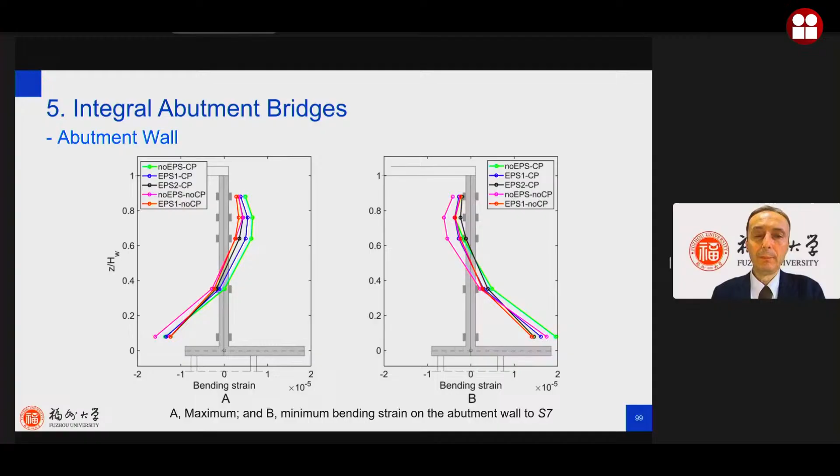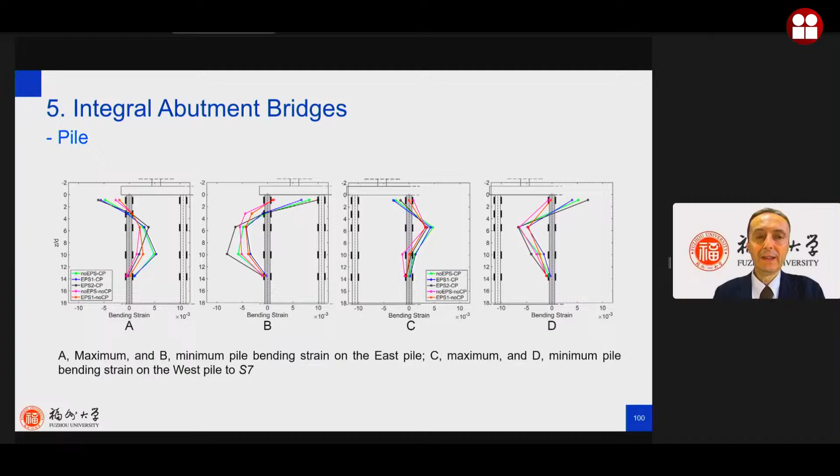We also propose a numerical simulation method done in OpenSees, with a continuum approach, adequately considering the boundary conditions that in these kinds of simulations should be adequately considered. This allows us to do it at one-to-one scale or reduced scale, and to consider different scenarios.

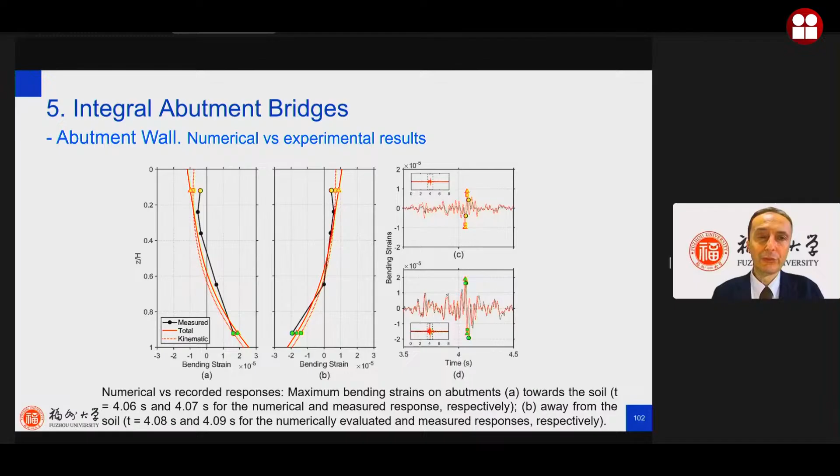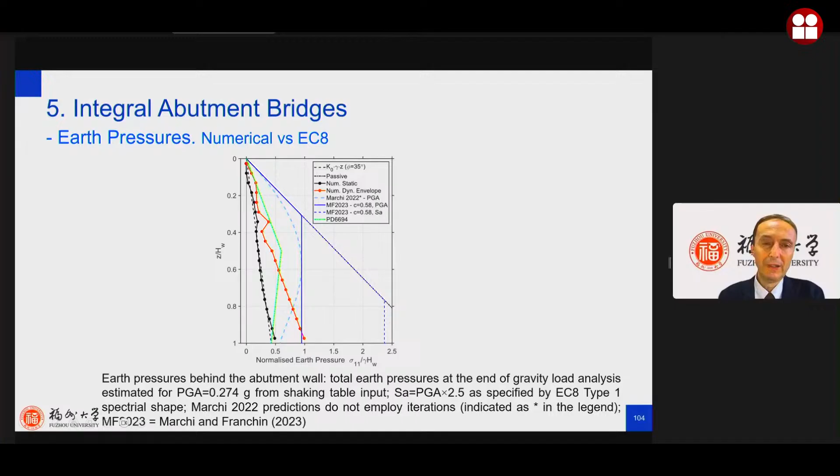This was really important also to compare the pressure on the abutment to models recently proposed by Marchi and Franchin, also included in the new version of Eurocode 8 Part 2. In the new Eurocode there will also be a part on integral abutment bridges. We found that this proposal is a little bit conservative, but that's also normal for something that should be codified.

So to conclude, jointless bridges have improved durability, lower cost associated with construction and maintenance, and improved driving comfort. The response of flexible versus rigid abutments should be better investigated.

We are doing some PhD theses to show the differences between one and the other. Pre-hole seismic isolation, or geotechnical seismic isolation as it's called, can be a promising technology allowing us to increase pile dissipation capacity and flexibility.

Compressible inclusions, like EPS, reduce the acceleration of the bridge deck and the settlement in the backfill, while disconnecting piles from the cap decreases bending near the pile. We also developed this modeling strategy that seems to work quite well.

So of course this is only an introduction to the problem, but if you are interested, I'm really, really happy to collaborate with you. To finish my presentation, I want to tell you again what I already told you at the beginning.

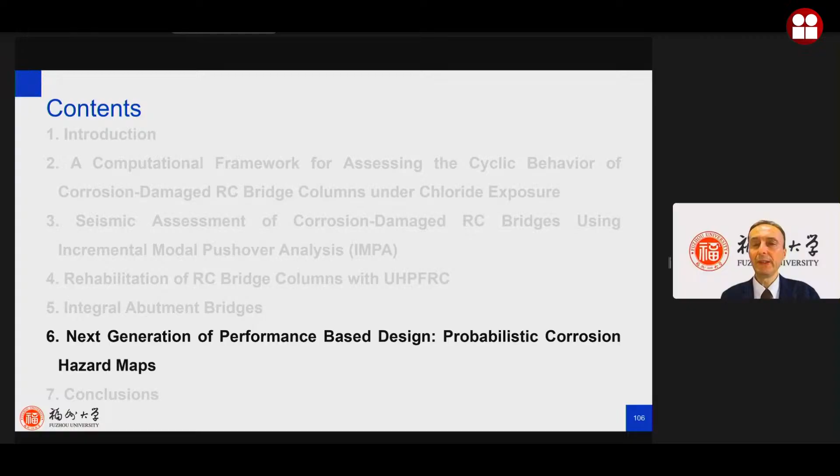So why, in the last decades, have we put so much attention into developing reliable seismic hazard maps, but regarding corrosion we still use some very simple indications? Can we take a step forward to develop a next generation of performance-based design using probabilistic corrosion hazard maps? This is what we try to do.

So, to extend the performance-based design approach in use within modern codes to durability issues.

So we did it for an island, Hawaii Island in the United States—not because it's probably nice, I've actually never been there, but because to develop this corrosion hazard map you need some data, and this data was available for this island, so we did it for this reason.

Which data do you use? You need data regarding sea waves and salinity, temperature and humidity, rainfall and wind, and also the chloride deposition rate. This chloride deposition data is not so common. You can obtain it through the wet candle method, but you need to place it in various locations. It's not so expensive, but if you don't do it, you cannot get these kinds of structures analyzed. It's the same as with seismic hazard maps—we need a lot of data and a lot of sensors to do it.

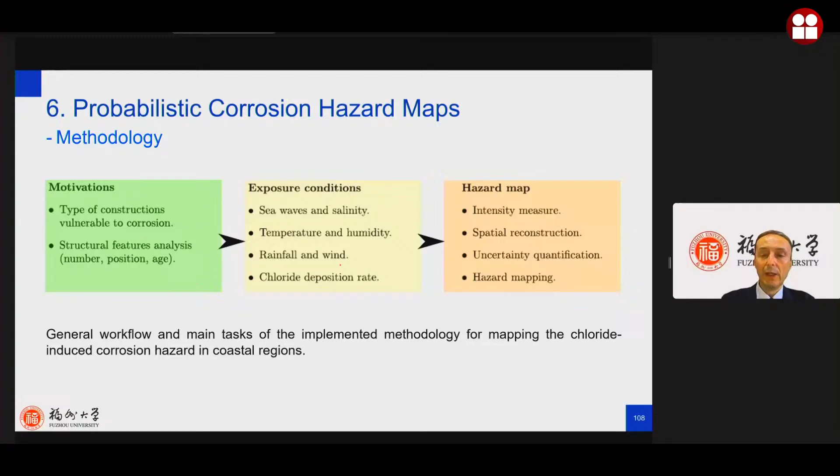So we considered this island. I told you we also analyzed the bridges existing on the island, to give you an idea—they are mostly on the coast. What they did was measure the chloride deposition rate exactly along the coast, following the bus stations, placing one sensor at each bus station.

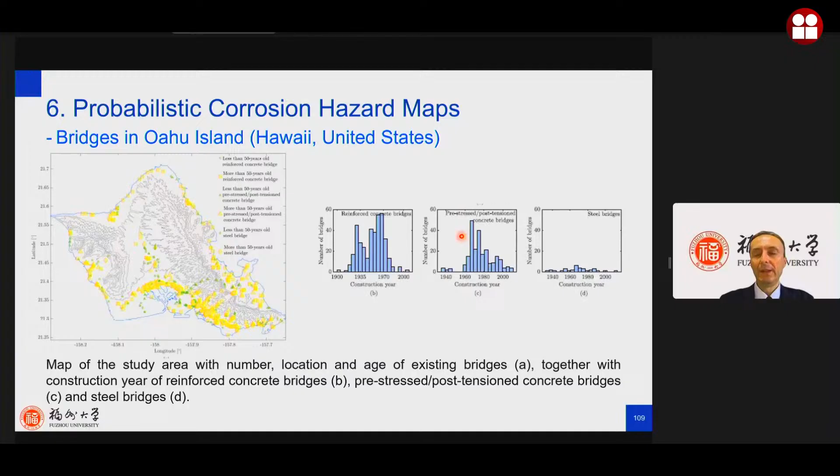So we analyzed the sea waves, temperature, wind speed and direction, and the chloride deposition rate we obtained. From this, we could develop some hazard maps considering a probability of exceedance of 2% in 50 years, 70 years, 100 years, and you can see different probabilities and different hazards.

Of course, to do this, you also need to make some hypotheses regarding cement content and water-to-cement ratio. We did this because in this way we could get data from some analyses done in Brazil by other authors—only for that reason. But what we want to show is that it's possible to develop this kind of map. Probably they need to be improved, but if we don't start, we will never improve them.

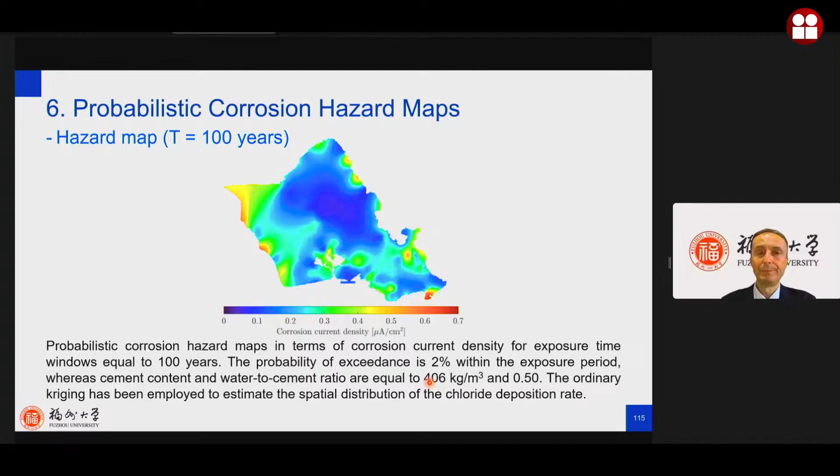So to conclude, coastal areas are one of the most active zones on the planet. As of 2010, the share of the population in coastal regions living within 5 kilometers from the sea was 34% and 46% in Italy and Spain, and 45% in China.

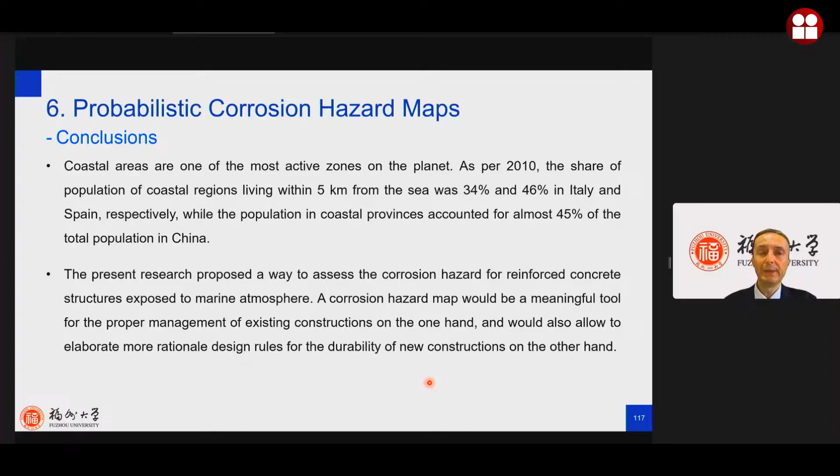And so the corrosion hazard map would be a meaningful tool for the proper management of existing construction on one hand, and also allow us to elaborate more rational design rules for the durability of new construction on the other hand.

These are my main conclusions, but they only summarize all that we have seen before. So it's a summary of all the conclusions I made before.

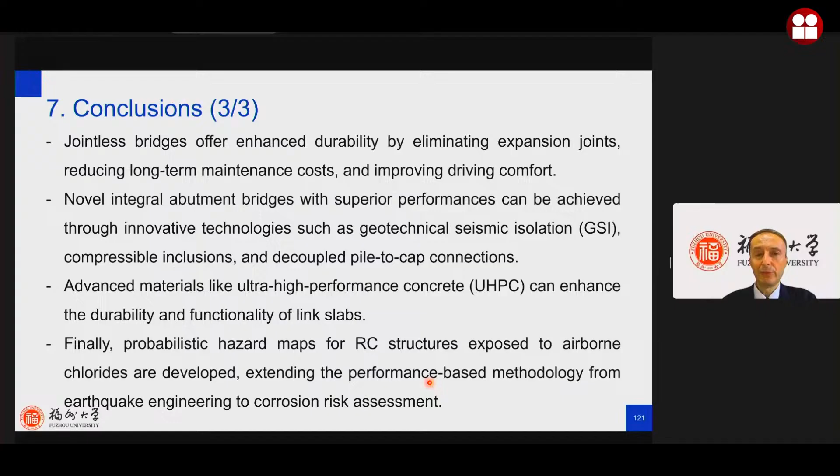I think we can also shift and go to the discussion phase. I'm very sorry, probably I took too much time, and I'm sorry for that.